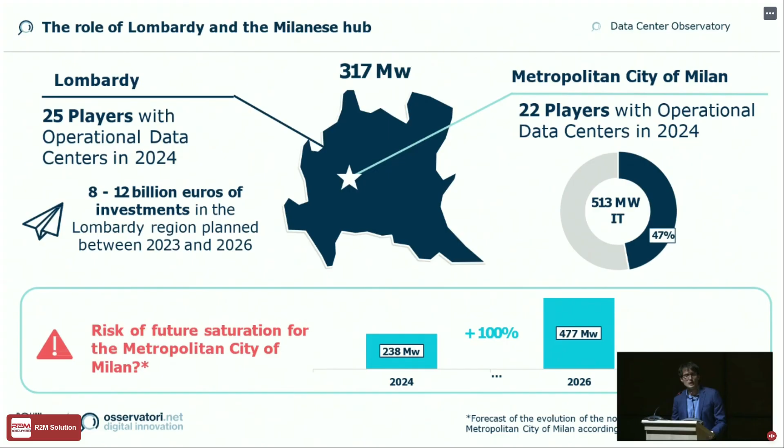And we expect to double the amount of data centers just in 2 years, because at the end of '26 we expect to arrive at 480 megawatts installed.

As I said, it's a very good moment for the developing of the market and to play an important role, not just for Italy but for the European market in general, because the European market usually was developed in the 5 most important markets, the FLAPD markets, but in the last couple of years they have had a slowdown in the developing of investments.

This situation creates an opportunity for all the Nordic countries, also for climate conditions, because of course it's easier to manage the temperature issues connected to data centers, but also for all the South Europe markets, so Spain, but of course also Italy. So it's very important to create a good environment for investments, because we could have a role as one of the most important computing centers, not just for our country but for all the European market.

So I think I gave you a little overview of this market. I hope it was interesting.

Fantastic, thank you so much for this introduction about the market, definitely necessary as context. So let's move on with Gianluca Metti, who will tell us about why data centers are not an evolution of logistics, as we said before.

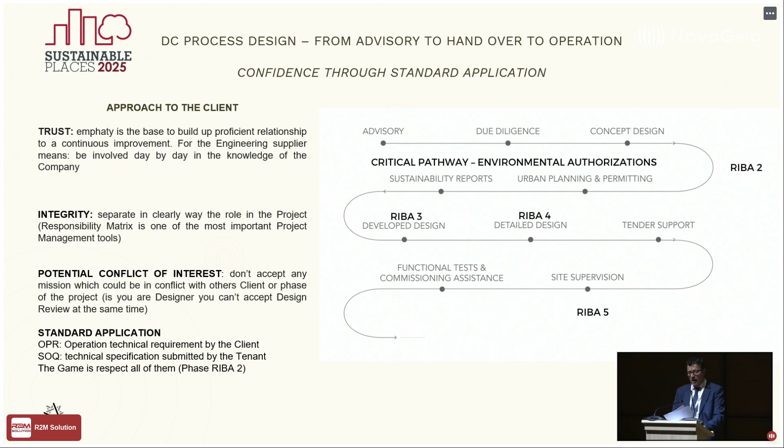So what is important is to develop a very strong relationship with the client, in any single part of the stage. The most important aim of the project manager is to define in a transparent way where the risks are, how we intend to mitigate them, and what that methodology is. So if we wanted to go through this conversation, the critical points are...

The critical points start from a different system to measure the key factors in a data center that are totally different from logistics. Logistics measures efficiency on square meters, and the value of the asset, of the land, is measured on that. But it's not the same for a data center.

Data centers have as a fundamental key point how many megawatts can be delivered for IT, and the capability of the asset to receive electricity power. So when you are doing a test fit, in all the process you have to follow during the due diligence, the first request is how many megawatts we can deliver in the asset.

What is one of the most important key points for efficiency is the PUE. The PUE is a very simple indicator that measures the total facility power over the IT equipment power. That means that if 100% is the need for IT, a PUE of 1.5 means that you need 50% more to ensure the operation of a data center.

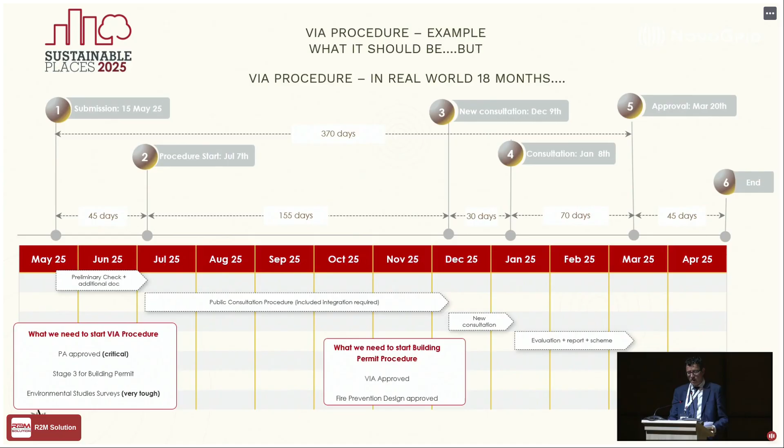It's, in my opinion, very interesting - let me take only 2 minutes about the design process and the learning curve we have during the design phase. Usually for DC field we use the RIBA process. This is a protocol defined by an English institution, and they develop the RIBA in 7 different stages.

But what we need to focus our discussion on is only the first 5. The first stage is related to advisory, and usually we take the RIBA till RIBA 1. At the end of RIBA 1 we have a test fit, which is an exercise that tries to fix in a geometrical way the capability of the plot, but it's not yet investigated for the next stage - that means environmental, for example.

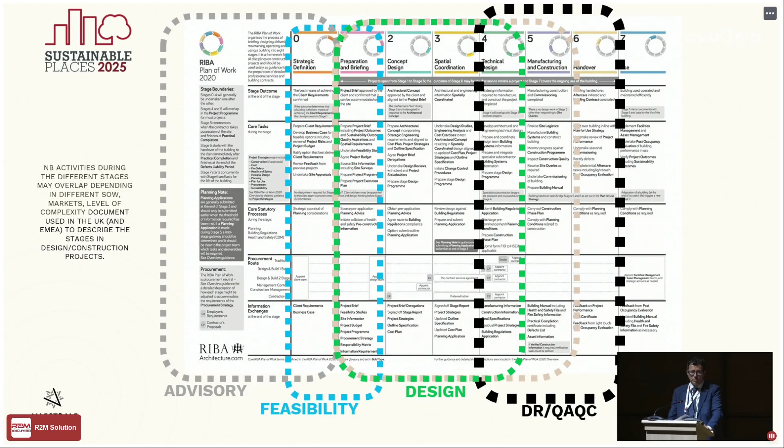The critical point is totally on the second stage, where you have to totally complete your survey. You have to be sure that you can go on and proceed with the building permit. Then, after the third stage, which usually is our definitive stage in the Italian protocol, we can launch the building permit application and also investigate the market with the contractor - not in a definitive tendering way, because we need stage 4, but we can collect all the offers.

The plant replacement strategy is one of the most important reports of the total design process, and we need to implement it in stage 2. If it's not possible to remove something from the plot, for example a transformer or genset, it's not correct to go on with the project.

What happens after the design phase? The engineering company can also be involved in QA/QC and design review. These are two different things. Design review is when the client asks a third party to go deep into the project and try to individuate room for value engineering.

QA/QC instead is a process of quality control, because usually when you work in other countries you don't have the clerk of works. In Switzerland, for example, this is the case, and you need QA/QC. This relates to the point I described before about the potential situation where integrity of the professional is needed, because QA/QC and design review cannot be covered by the people who developed the engineering.

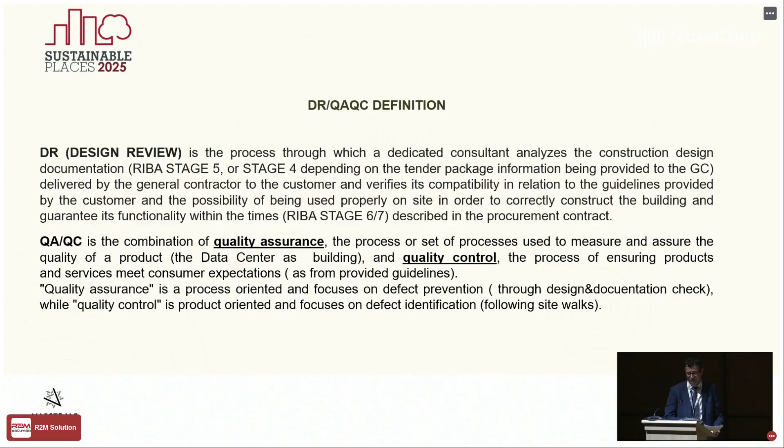Thank you, Gianluca, thank you so much for showing us. Maybe there were some additional slides in the deck, but I think it was a very good introduction and anticipation for the next speaker and topic we'll address now. You mentioned and argued that data centers are not logistics, but also introduced the idea that there are many different stakeholders involved in this long life cycle. So Mattia Mariani will now tell us more about key performance indicators and the different stakeholders and what interests they bring into data centers.

Good afternoon. For me, the data center market is a topic I started working on 10 years ago. One of the points I discovered when I started on this topic is that it's different from other asset classes. And the question is, which is the key performance indicator that is appropriate for this asset class?

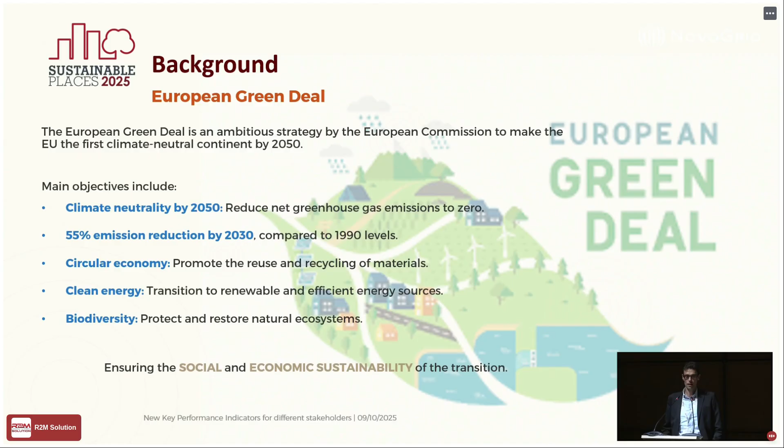Starting from the background, the data center market is the same as other markets. We start, in any case, from the European Green Deal, and I feel it is similar to other markets. As a data center provider and consultant, we have the target of climate neutrality and the reduction of emissions, and it is the same. But there is something that is different.

These two topics are really important key elements, and also part of the discussion when people say data centers are bad or not sustainable. The topics are related to water usage, renewable energy, and how the data center can be integrated with the city and the community where they are placed.

The directive gives us some points we have to measure, and it's really important for the data center market that these parameters have to be declared and measured every year when the data center is operating. This means that for the data center market, these key parameters are not only important for efficiency, but also because it is a European regulation we have to comply with, and every year you have to declare it.

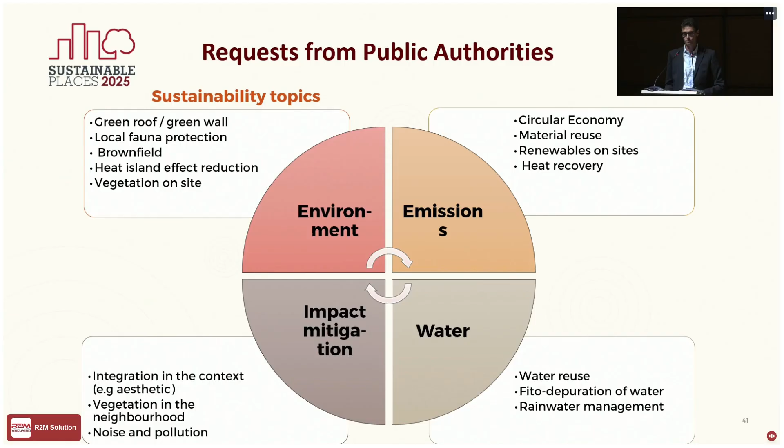The reason is simple. When you use artificial intelligence on your mobile phone, you want a very quick answer. And for that, you need a data center close to you that can give you the network needed for the connection. So it's really important: if we put the data center closer to the city, we need to integrate it with the city. The integration with the city comes from several points.

As the Italian Data Center Association, the sustainability group works a lot on the ESG topics of the data center. One of the main topics was related to the connection with the community, and how the data center can be connected to the community. There is one topic really focused on, not only by the data center provider, but also by the regulation.

And the topic is heat recovery. Data centers produce a lot of hot water, and this water is waste for the data center. If we are able to recover this heat from the data center, we can use it for the city. This is the first way that allows us to create a connection between the city and the data center.

The second is integration. This means the data center gives an advantage to the community that lives close to it. Taking from something that comes from the regulation, from the VIA process, I can say it is really important that there is a focus from the data center market on the people who live close to the data center, creating a high quality environment.

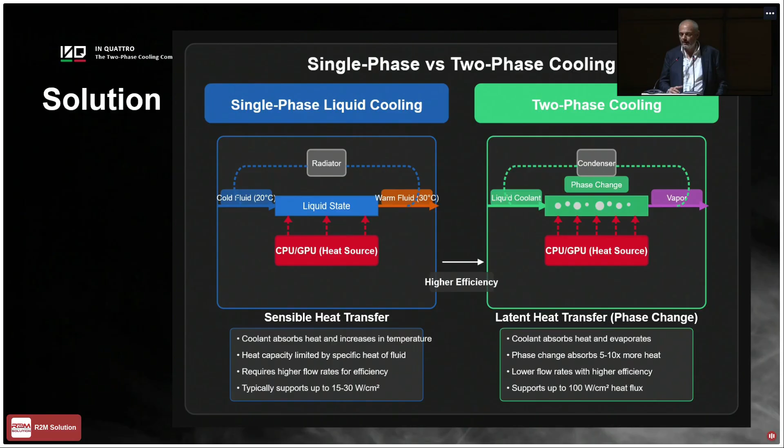Heat generated by the processor causes evaporation on the heat exchanger, so the higher the thermal power, the higher the quantity of vapor. If we compare this with a liquid cooling system, where heat is removed by increasing the temperature of the liquid medium, we find that this new cooling technology is more efficient than standard liquid cooling technology. This means lower flow rate, which is a critical and very important parameter, and in general a very high thermal power can be removed from processors.

So what are the advantages that this technology can provide to the data center industry? First of all, very high thermal power density can be removed, up to 100 watts per square centimeter and more, 120, 150. Maybe for you these figures are not interesting, but 100 watts per square centimeter is, just to give you an idea, in the lower range of fusion reactor components.

Of course this is the lowest range; the highest range is maybe 5,000 watts per square centimeter. So it's completely different, but this just gives you an idea of the high values we're reaching with the new GPUs. For example, the H100 NVIDIA GPU, famous for being used for ChatGPT, is about 70 watts per square centimeter. So we are quite near the limit that I mentioned.

Another advantage is that it's possible to use a dielectric fluid, so we don't use water. A dielectric fluid doesn't conduct electrical energy or electrical current. So even in the case of accidental leakage, you don't have destruction of electric and electronic components under tension, with tension applied.

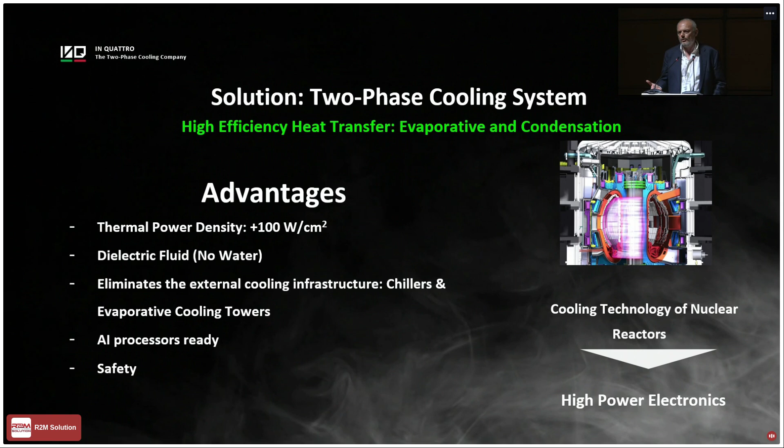So these are the main advantages of this technology. What is the origin of this technology? We didn't invent anything, actually. This technology has been developed over the last 60, 70 years for nuclear reactors, but of course at large dimensions and geometries. What has been done during the last 30 years of research around the world is to reduce the dimension of these systems down to the size of electronic components in order to cool them. These components are generally related to high power electronics.

Okay, so what is possible to do with this technology? The PUE, the power usage effectiveness, can be reduced from the range between 1.5 and 2.5 for a traditional cooling system. This depends on the technology used in the data center and the quality of the cooling system. It's possible to reduce this down to a theoretical limit of 1.05.

Between 1.05 and 1.2, this range depends strongly on the configuration of the data center. Just to give you an idea, if you put the external heat exchanger called a dry cooler - a system that is not a chiller and doesn't use water - you release the heat generated in the processor outside with this system. If you put this at 30 meters distance from the data center, the PUE is about 1.07. So this is just to give you an idea of how important the design and configuration of the data center is on this particular KPI.

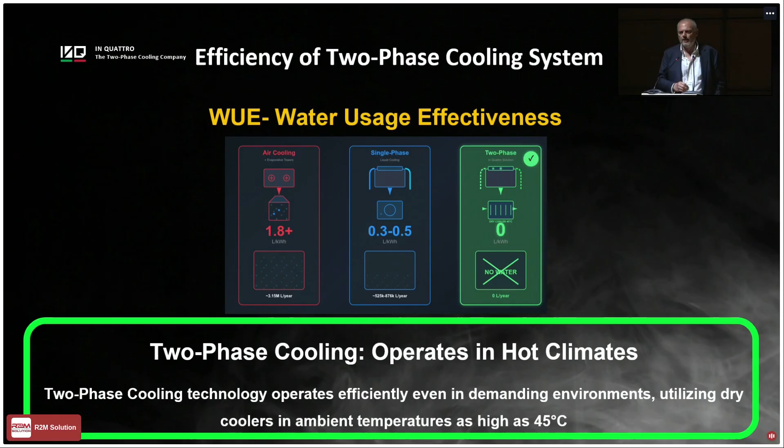Today we are also working on developing a new patent in order to increase this limit up to 60 Celsius degrees. Why? Because even when external ambient temperature is 45 Celsius degrees, you can find that on the surface of the heat exchangers, on the roof of the data center or outside the data center during summer season, you can reach higher temperatures, like 50 or 55 Celsius degrees. So this is the reason why we are going to improve this value. But not only for this, but also for a European project where we are involved with other partners, and this project will be presented later.

So with this system, it's possible to simplify the design of the data center by using fewer mechanical components, and as a consequence you have lower maintenance overhead. In the case of a two-phase cooling system, actually you don't need maintenance, because the fluid is quite clean and you don't have issues inside the flow channels or the piping system.

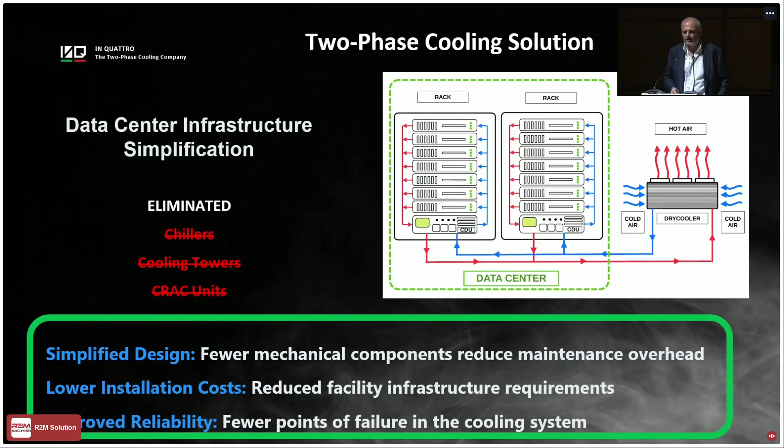This is, again, as I told you, due to the more efficient heat transfer mechanism of the system. We also use aluminum as a material and not copper. This decreases the cost and also the mass of the system, and it also reduces the cost of manufacturing, because aluminum is much easier to work with.

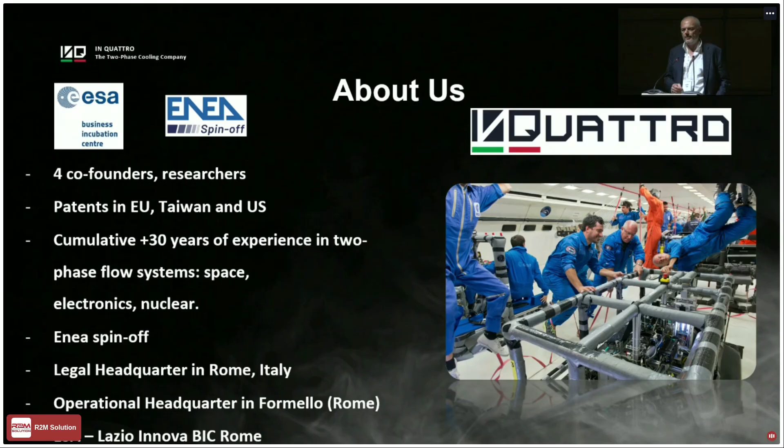So this is the team. At the moment, we are about 12 people, and in the future we are raising a funding round, so we will increase this number of people.

So thank you for your attention, and I just want to mention that In Quattro is the company, and sometimes you can see Eva Cooling. Eva Cooling is our trademark for our technology. So thank you.

Thank you so much. A very interesting journey into energy optimization. And also congratulations for this interesting company, bringing up the evidence that there is a transferability across technical domains. So really interdisciplinarity can help advance sustainability in the sector.

And now Alessandro Piccinini will tell us instead something about the applications of digital twins to support decarbonization. Thanks.

Thank you for the introduction. Good afternoon, everyone. So before starting with the presentation of the R2M digital twin solution to support decarbonization processes, I just prepared a very quick introduction regarding the energy impact of data centers in the coming years.

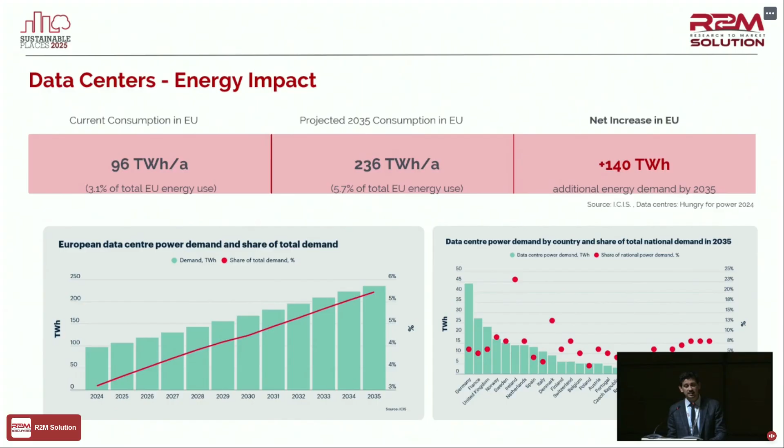Currently, data centers are consuming around 96 terawatt-hours per year, and by 2035 it's expected to increase by 140 terawatt-hours. This is a huge increase, but since it's always difficult to understand these big numbers, I prepared a comparison with the new EPBD4 challenge.

That is one of the main arguments that R2M treats. Basically, the new EPBD gives some targets for residential and non-residential buildings. For non-residential buildings, we have two main targets. One target is for 2030, with the main scope to renovate the 16% of the worst performing buildings. And the second target is to renovate 26% of the worst performing buildings.

So here I prepared a very quick raw calculation, and probably the consumption will be a big target, but it's not the point of this presentation.

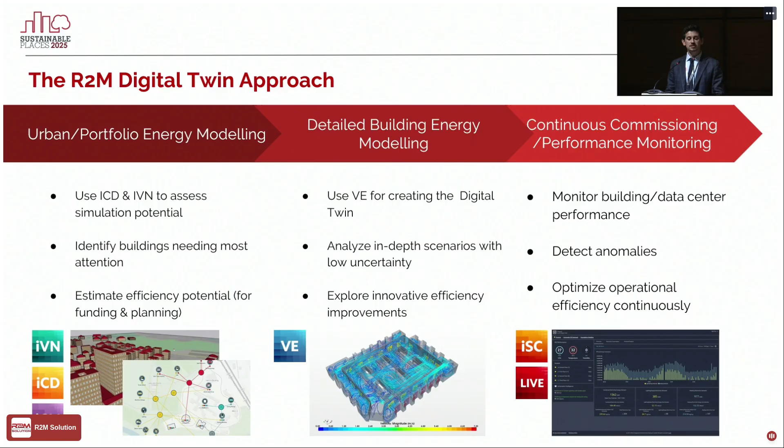Finally, this is a new path: continuous commissioning and performance monitoring. Here the scope is to utilize the detailed model to detect anomalies in the real building. So to do monitoring, but not just monitoring, but also reuse the detailed energy modeling to assess and do fault detection and diagnosis in buildings and data centers.

So at this scope, in order to present our digital twin approach, I'm going to present a series of case studies, hoping that they can be interesting.

The first case study is a work that we did with Eurac and Seingim for the municipality of Padova, where the scope of R2M was to assess the energy needed for heating and cooling for the whole municipality of Padova. What we did here was to utilize the ICD tool in order to model the whole municipality, and then, thanks to the tool, we were able to assess the heating and cooling demand of the municipality. With this heating and cooling demand, we created the district heating and cooling grid.

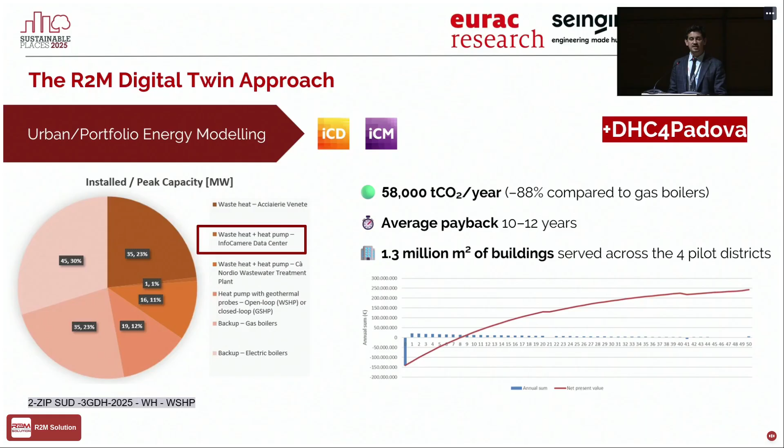Just to mention, from the grid, we were able to recover some waste heat from a data center, and thanks to the recovery of waste heat, we were able to have a very good return on investment from the district heating and cooling grid. So here you can see some numbers.

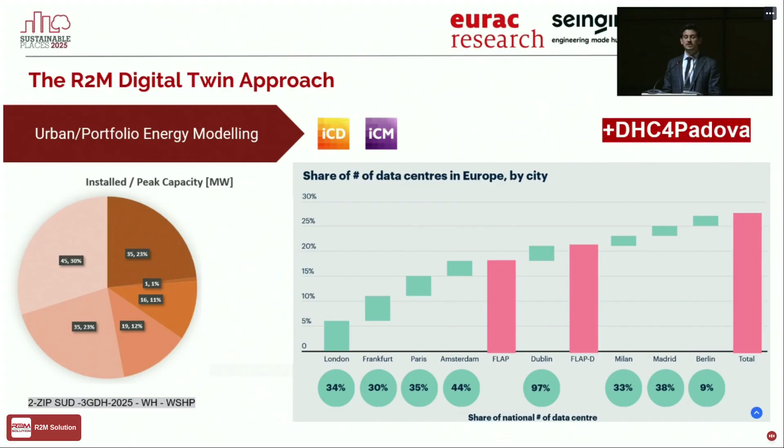What I would like to mention is the importance of this kind of analysis, the urban level energy modeling, because as you can see from this slide, in the EU most data centers are located in big cities. 34% of the data centers in the UK are located in London. 97% of the data centers in Ireland are located in Dublin. So it's very important to do this kind of urban level analysis to understand how much we can recover from these data centers and how much we can give to buildings in order to improve the efficiency of the data center, but also to improve the efficiency of buildings that are near the main cities in Europe.

So the scope of this work was not just to take the plaque of LEED, but to follow the design team in reaching the best energy efficiency for the building.

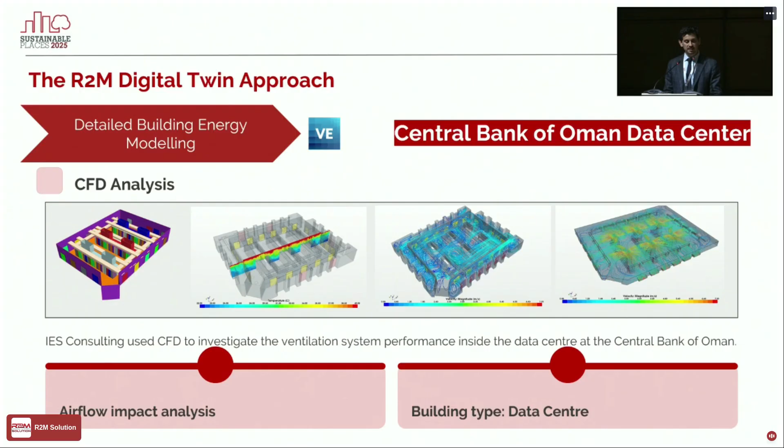Another case study, this is from the IES team, made again with IES VE, the detailed energy modeling software. In this case, the scope was to study the ventilation system of the Central Bank of Oman data center. We utilized CFD analysis and did a detailed study of the ventilation in order to improve the ventilation system inside the data center.

So the only problem right now with these models, these detailed models in general, is that usually after this kind of analysis, they are not used. They go in a bin.

So the scope of these two platforms, iSCAN and IES Live, is to reuse this kind of model for doing anomaly detection, fault detection and diagnosis, for monitoring. What we do here is use the platform IES Live, in which we can monitor all the performances of the data center. But we can also compare the performances of the data center with the digital twin that we made with IES VE software. By comparing the real consumption and the simulated consumption, we can detect anomalies, simulate energy efficiency scenarios, and things like that.

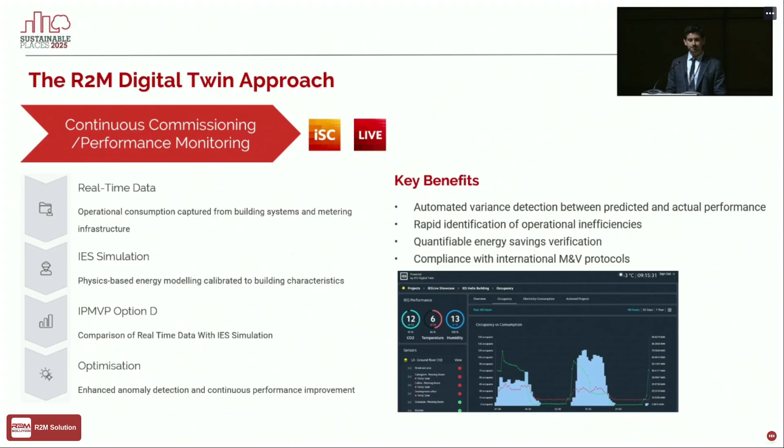So last thing, the slide is a bit crazy, but this is a new application we are creating to give our experience to everybody. We are creating this new application, it's in a proof of concept phase. Basically, this application can be used by anyone who can put in information regarding the building. The scope is to have different archetypes, and one of the archetypes will be data center.

We already did a proof of concept for schools, and it worked well. I will present the case study later. Basically, this application will be a web application in which the user can insert some data regarding the building, and automatically the application will...

estimate the missing data regarding the building. And thanks to our experience in terms of energy modeling, we created an algorithm that will be able to assign this building to an archetype and to an energy model. Thanks to this methodology, we will be able to estimate the result of efficiency scenarios in different types of buildings.

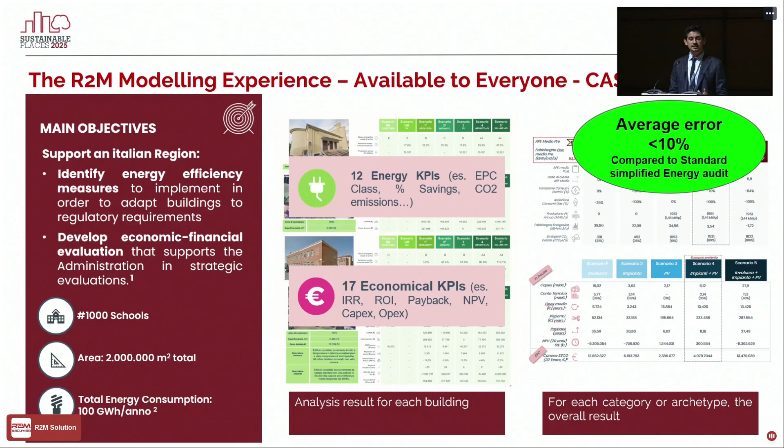with an average error compared to a standard simplified methodology of around 10%. So to conclude, if you're interested in this kind of product, tomorrow we are going to do a short workshop in room 5, where I will present the ICD platform and the iCM platform, the two tools for urban modeling. If you're interested, I'll be happy to present them to you.

Power quality refers to the flow of electrical power that supports proper operation, but the problems are connected to stable voltage, frequency, waveform, distortion, and interruptions. Interruption is one of the main topics of this speech. Voltage regulation and micro interruptions, also called micro outages, are problems connected to power quality.

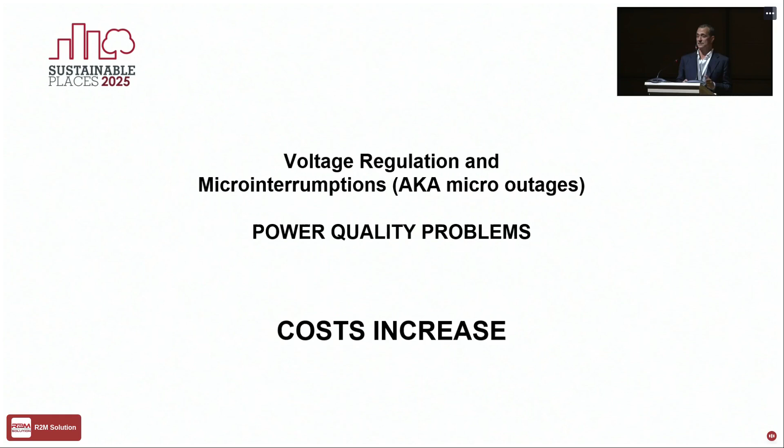The result of this is cost increase. Due to these problems, companies, industries, data centers, everybody has a huge increase of cost. Most of these problems are not due to the building, the property, the company, or the factory, they are due to the grid. But why?

There was a power outage that involved almost all of Spain, Portugal, and part of France. That means that in less than 5 seconds, 15 gigawatts, almost 60% of the energy distributed in Spain, suddenly switched off in 5 seconds. Try to imagine your company, click, in 5 seconds, your computers, undergrounds, all the plants or the servers, everything switched off in 5 seconds, and it lasted 10 hours. Just to give you an idea, this problem caused more than 1.6 billion euros in damages in 10 hours.

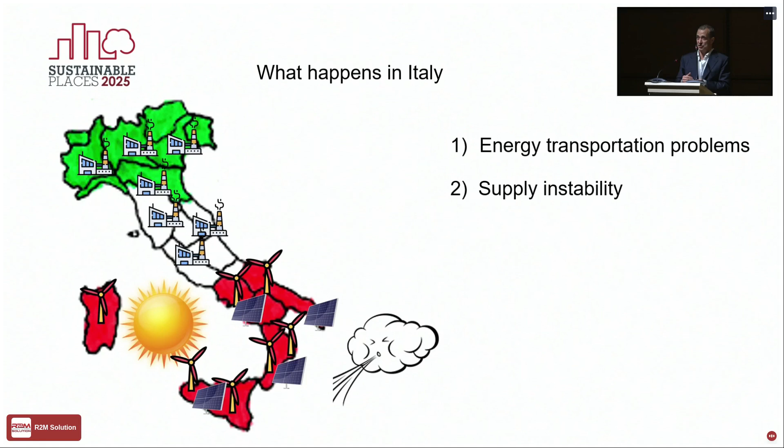What is Italy doing? In Italy, we have Terna. Terna is the grid operator in Italy. I can say Italy is much, much more advanced under this point of view than many other countries in Europe, included, of course, Spain, but also France, and UK. It's completely another level.

Terna is deciding to invest 23 billion in the next 10 years. Who do you think is going to pay these 23 billion? When people say, oh yeah, energy now it's very expensive, it will be low in the future — I'm not so sure about it. How will they invest it? Exactly in the points that we just discussed: increasing the cables, also connecting in a better way the islands, Sardinia and Sicily at the beginning, but also the connection with the renewables.

The grid must understand and must predict what the renewables will do based on the forecast. Of course, AI is helping a lot on this. But this investment will keep the problems of instability and transportation, of increasing tension, and micro outages. So, what are the solutions?

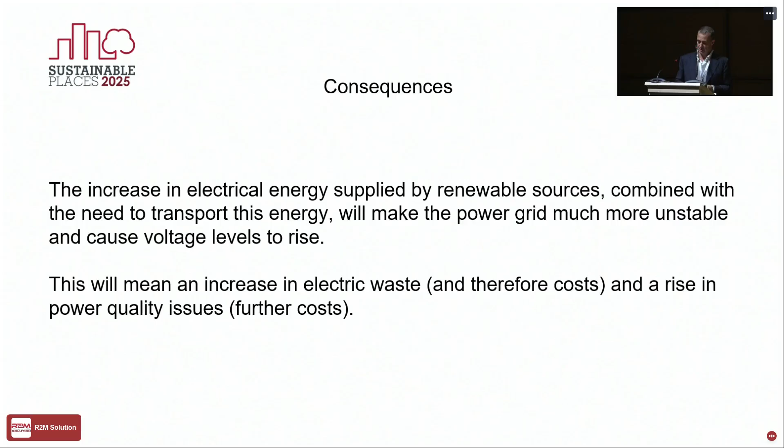The first one is the voltage optimization. Very quickly, the grid gives you a theoretical 400 volts in low tension power. But you must think, what do you do if you switch on all the plants, everything in your company? You must be ready to have enough tension to make everything working — if you open all the taps in your flat, you must have enough pressure to use all the taps, three showers, your wife, your son, whatever.

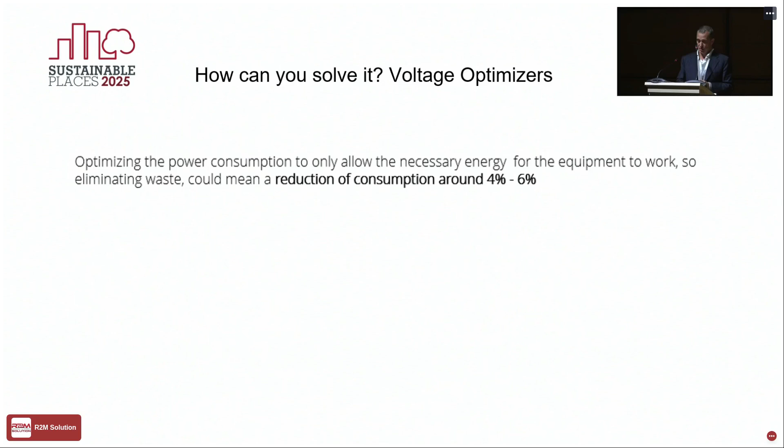All this extra tension becomes heat, becomes something that you don't feel, you don't use — it's thrown away, transformed into the effect of Joule, in a short time. So all this energy that is thrown away is paid by the consumer. There is a technology called voltage optimizers that can give a reduction in terms of electricity consumption between 4 and 6%, somehow filtering — I'm making it very, very easy — filtering and keeping all the extra tension inside and using it. So you do the same work using less energy, what we called at the beginning energy efficiency.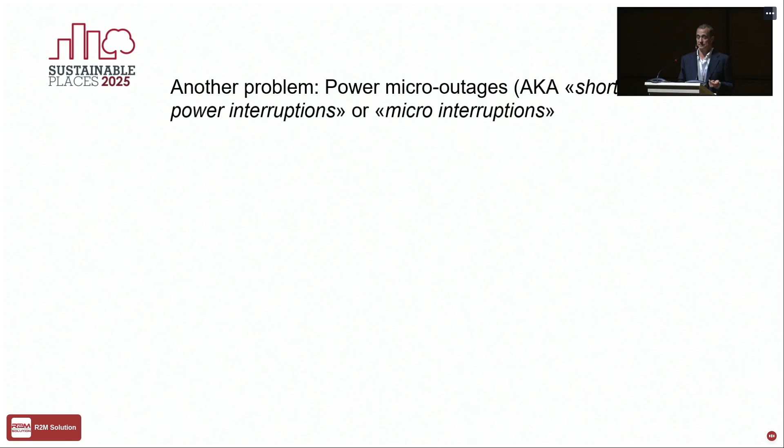This is the solution for voltage. Micro outages are interruptions, usually less than 1 second, that you could say, oh, it's just the light flickering or something like this. But especially for modern plants, it's a huge problem because modern plants have a protective system that, if there is a lack of energy, says oh no, something's going wrong — I stop everything before everything is gone. That means you have to stop the plant.

This problem could cause an incredible amount of money and trouble. I decided to give you an example of a company, one from a completely different field.

There is another example of a company that makes microprocessors close to a fab, but I don't want to talk about it. I can tell you every micro interruption costs them 300,000 euros. This company makes...

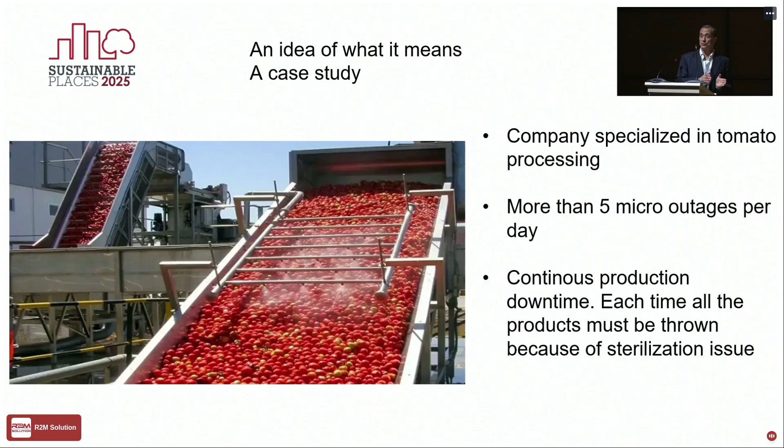Tomatoes. They make salsa. They are specialized in tomato processing. They used to have more than 5 micro outages per day. That means every time there is a production downtime, they have to throw away all the tomatoes already boiled, chopped, sterilized, because the sterilization process is interrupted.

So the product is not safe anymore. Try to imagine all the work you've done is thrown away because of micro outages lasting just 0.5 milliseconds. For them, it was a problem costing thousands and thousands of euros every day.

So they were considering moving the plant entirely to another place. Of course you can complain to the supplier, ask for your money back, whatever. But if you have to provide the sauce to Barilla or to Chile or whoever, and you don't deliver the product, it's not just about money, it's much more.

The solution to this kind of problem is a micro outage compensator. Without going deep into this device, what does it do? It works by supplying energy that flattens the outages, staying hidden and waiting all the time. When there's a problem, it activates and says, okay, you need energy for say 0.3 seconds, here it is. This gives continuity and the opportunity to keep working without problems.

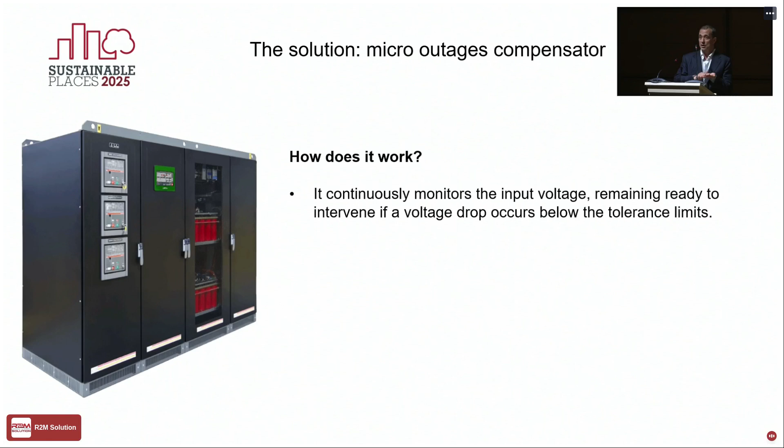So, final consideration: the problem is now as big as an ant, but it will get bigger and bigger in the future, and it will very deeply involve the investment, the ROI, and the business plans of companies. The good news is that solutions exist, and the market will develop more solutions in the future because we will have more problems.

This technology has been on the market for 15 to 20 years. The problems are happening now because the cost of energy is huge, the consumption of energy is huge, and the problems are growing year by year. Thank you very much, bye.

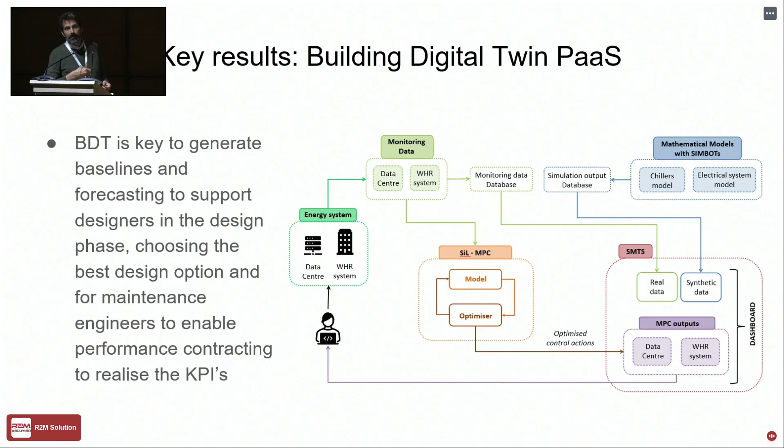adopt not only the data-driven approach, where we collect data from the real world and store it into a database that we can reuse to fuel some surrogate models used to optimize the system, but at the same time we would like to create a virtual copy based on mathematical modeling of each component that we have in the server room and in the building itself, in order to provide synthetic data in the end.

So we would like to pair the two, the real and the synthetic, to have a simulation tool that really works and that we can use with more flexibility to test new solutions like new control solutions, etc. The main limitation with data-driven approaches is that you cannot play too much with the system, especially if it is a critical mission system.

You cannot really destroy the system trying to characterize its behavior. With synthetic data, you can do anything you want, even planning to substitute part of the systems.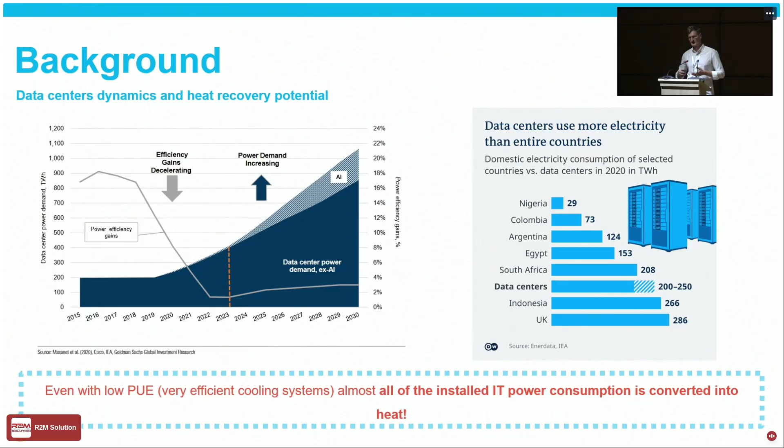The sum of all of the energy that's required for the data centers is comparable to the energy consumption of whole countries. It's a huge amount. And we're able now to reduce the PUE quite a lot. I think we'll hear more in the HEATWISE project after, about how to get to a PUE close to 1. But in the end, all of the energy that you put into the system will be dissipated as heat at some point.

And why not use that huge potential for something else? This is exactly what the MODERATOR project is focusing on. Our focus is really this waste heat recovery system, and we are doing that in different steps. Our main focus at the beginning is the development of an immersion cooling system, where the data racks are fully immersed in a dielectric fluid. We do numerical system simulations where the goal is really to get the dielectric fluid to the highest temperature possible to then gain as much as possible for a secondary use.

Then what we're also focusing on is the development of a storage unit to bridge this intermittent availability between the energy provider, so the immersion cooling unit, and the secondary use.

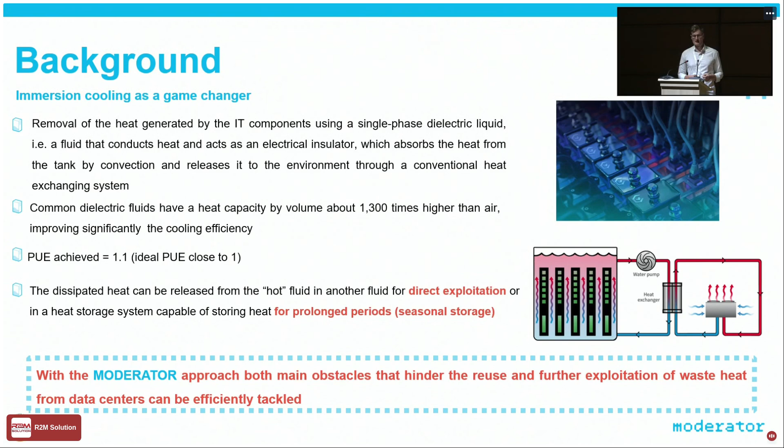Within the project, what are we really optimizing? First, as said before, we're looking at this immersion cooling unit to really reach the highest temperature possible. We developed three phase change materials that will be used to take the heat from the immersion cooling unit, store it, and then make it available for a secondary use that we'll look into a little bit deeper after.

And the last thing is this highly efficient multi-layered insulation material, where there's also a circularity aspect. So we look into insulation materials that are produced from waste, namely, for example, expanded glass spheres from PV panels and so on.

One of our main goals is to have a certain amount of scalability, so the system should be really modular. The immersion cooling unit that we are designing is 40 kilowatts, and the storage unit is also dimensioned to fit this 40 kilowatts. So in the end, from these 40 kilowatts, we can scale the system to any size that we want. This is really one of the main focuses of the project.

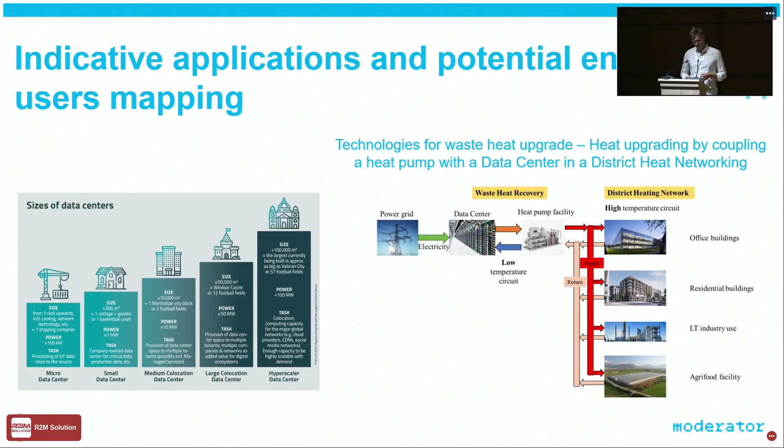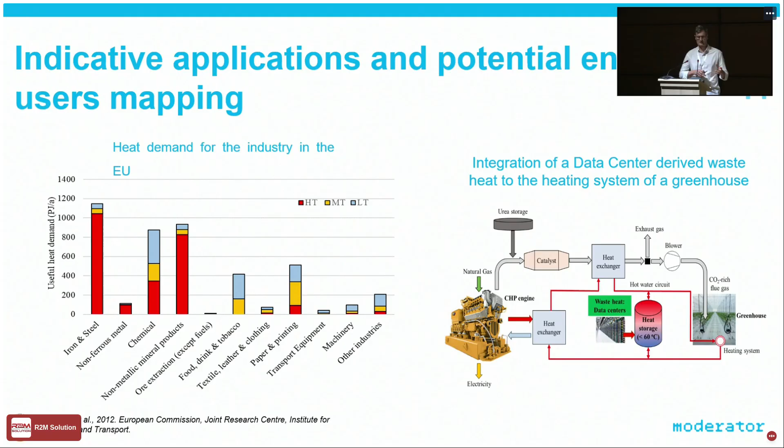This just shows another possibility. We're currently looking at different industrial sectors. We even already looked into different fish farms, for example, where you could use the heat. We have a case study in Norway, because there you need a lot of low temperature heat to keep the water temperature at a certain level. Then, of course, greenhouses are always a topic, and generally we're investigating where we can apply or reuse the heat that's stored, looking at different case studies.

Then just quickly into the consortium. We are actually 11 industry partners in this project, distributed all around Europe. With the first pilot that we're building in Greece, we are working together with Synapsicon. They already have some data centers in use, and we'll apply our system design to a real case there.

Then, for example, we have partners like Sintef, they do the whole simulation part, fluid simulation, how to really reach the temperatures within the immersion cooling unit. Gerosen and Opholite are working on the insulation material. We at HSLU, together with Cowa Thermal Solutions, are working on the material development, where we also have a pilot plant already in operation in a building district, providing heat for domestic hot water and floor heating for these buildings.

Then we have Hycool IT. They are developing the whole system integration, the interaction between each of the components, and there's quite a strong representation in Greece.

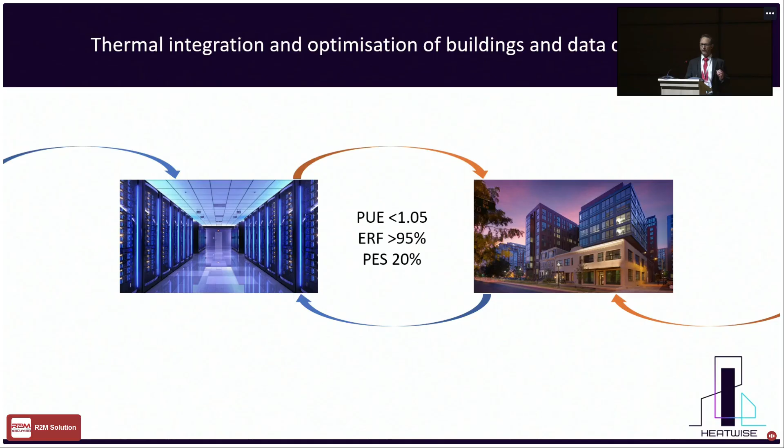Good. We have 3 key indicators: PUE, which you've already heard about - this is one of the most important, yet often challenged, indicator of the data center industry; ERF, energy reuse factor; and primary energy saving. These are our 3 key objectives, and this is world class. You've seen from the previous moderator a PUE of 1.1 - that's already excellent. The average in Europe is now 1.618, but there are still data centers with a PUE of 2. An ERF of 95 means we are capturing almost all the heat that is generated. And a primary energy saving of 20% means a massive CO2 reduction.

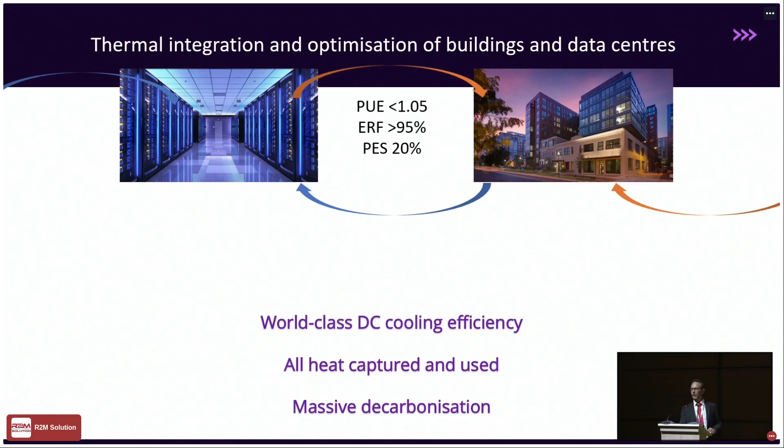Before going further, I'd like to invite you, if you are engineers, to convert yourselves into businessmen. What is the meaning, from a business perspective, of the PUE? The 1 describes the energy consumption, the energy cost of the IT. After the dot comes what is related to cooling and all kinds of auxiliary energy consumers, electricity consumers. So when we usually talk about efficiency of data centers, we're talking about the figures after the dot - so 0.6, now 0.5. But when we talk about heat recovery and heat reuse, we are also talking about the first figure, the 1 - practically 100%, or maybe 98%, of the electricity is converted into heat. So we are talking about both of these figures.

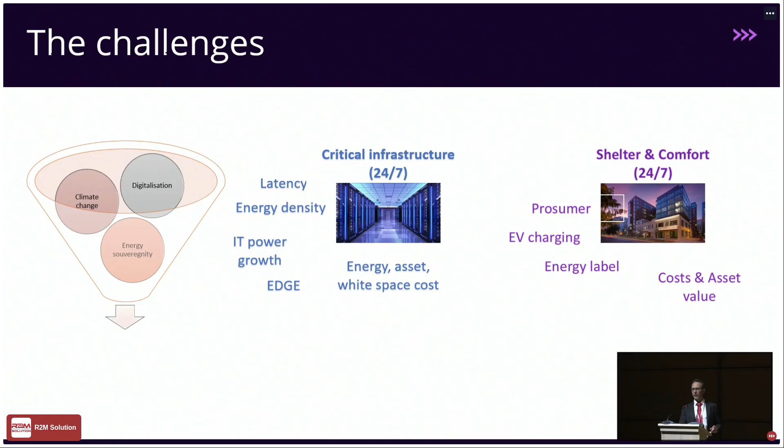Let's see further challenges. In the previous session there was already a lot of discussion about that, so I don't want to spend time here - latency, energy increase, EPBD, all kinds of cost and asset value issues with buildings, which determine how these entities are operated. Both are critical infrastructure: data centers have to work 24/7, and buildings provide shelter and comfort for equipment and for people. So these are two entities which are forced to live together - at least this is the idea of the research, and the idea of EPBD and EED. But what is the problem?

The problem is the cooling of the data centers and how it is happening. The mainstream is that 95% of data centers are air-cooled. Air is a very bad energy transfer medium. Practically, how it's currently done: 18, 25, maybe 30 degree cold air is blown onto the servers, and what comes out is around 25 to 35 degrees. When you look at the building side, they are far from this range - especially if you're talking about a modern building with low temperature heating, these temperature ranges are not really good.

There is one more problem: how we are setting these temperatures, whether we are giving the right amount of cold. And no, we don't - sometimes the CPUs are overheated, there is a delay in provision of cold, and then thermal throttling happens. What does thermal throttling mean? You put a lot of capex into your IT and it is not working. Often the utilization rate - that was a KPI in the previous session - is maybe 60%. That's too low; your money is not working. So at the end of the day, you are wasting your money and wasting the energy you produced, and it is also going into the air, into the environment, practically like litter.

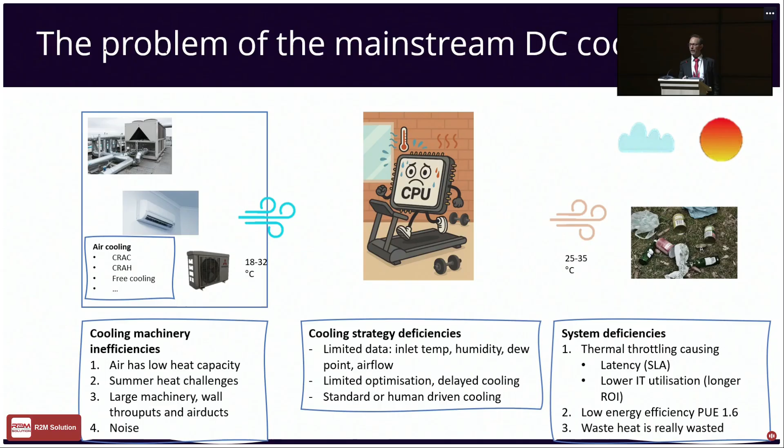And we thought we could do it better. We should not just think of adjusting the current way of cooling, focusing only on air temperature, because that's what the standards say - ASHRAE tells you what the humidity, the airflow, the temperature should be, and if that's fine, that's fine. But it's not like that. So we are focusing on the components - we want to know whether they feel good, we want to know what their temperature is.

There is an optimum temperature, or the maximum temperature where they can work - 70, 80, 90 degrees. So if we know their temperature, we know how much cooling to provide. So we provide air and we provide liquid cooling.

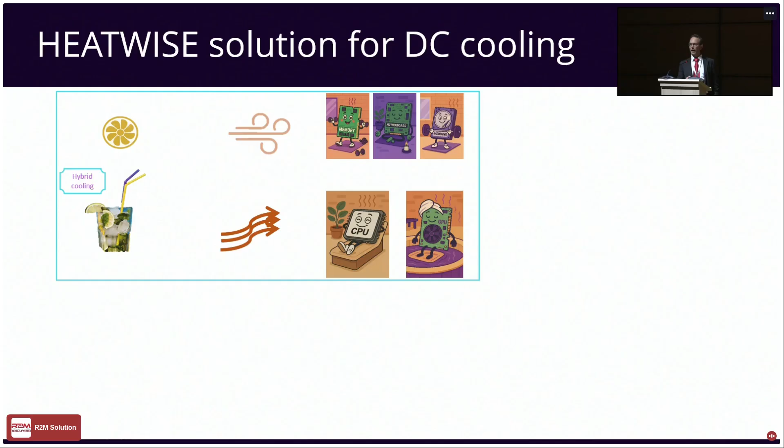You heard dielectric - you remember from the previous session what it means? No water, absolutely harmless, phase changing, okay? So the latent energy is also exploited, and we are giving it to the right component - liquid to the CPU and the GPU, and the rest gets air-cooled.

In this way, we can achieve much higher temperature levels, but these are already useful for the vast majority of the buildings.

Key here, as I mentioned already, is data. Data in all stages of the cooling system - at the production side where it is absolutely needed, the consumption, and at the building. So everything is turning around data.

If we implement this solution, we have a pretty impressive proposal. We believe we can achieve 95% of IT utilization, stable and on-demand temperature, even reaching 65 degrees liquid to liquid, which means also impressive business advantages in CapEx and OpEx. We believe we can achieve lower CapEx, lower OpEx, and an overall lower TCO.

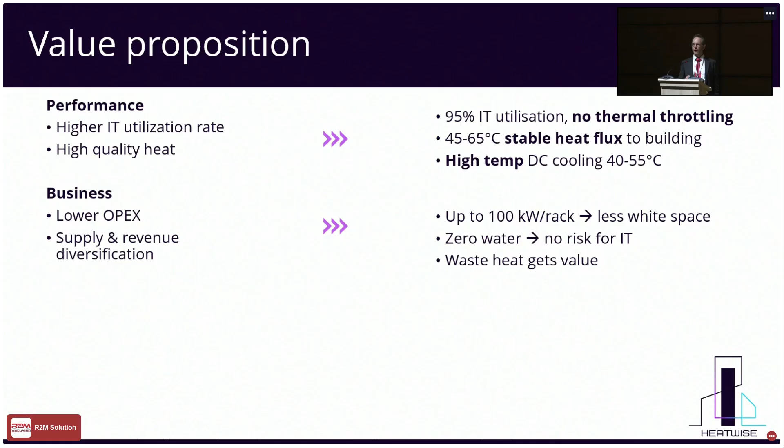And we can fit in one rack something like 100 kilowatts of IT, whereas currently it's around 5, 8, 12. So it is a big jump.

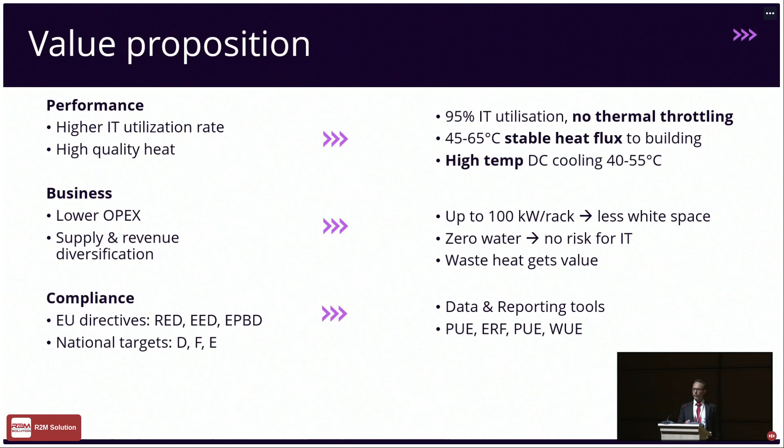We are developing tools that help with reporting, automatic reporting, and of course decarbonization. We are implementing this solution at 2 out of the 5 pilots - in Switzerland at EMPA, and at RISE in Sweden. We are half-time, still 1.5 years to go.

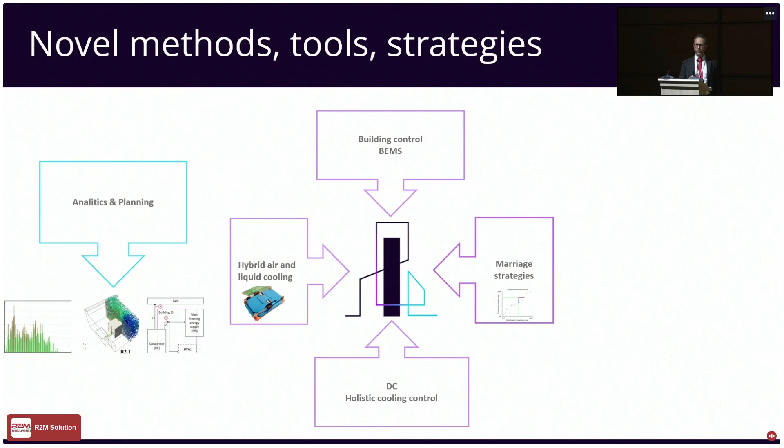Let's go quickly to the technical solution. We have several tools which we are developing - novelties in analytics and planning, looking at the building, what is the potential for waste heat. Then the data center and business case development is coming. So, analytics.

There is a new methodology that we developed, and new KPIs on how to assess the potential of buildings - how much waste heat they are able to absorb. We have some recommendations, very simple: find the low temperature systems in your building and connect your data center to them. We also developed a metering strategy.

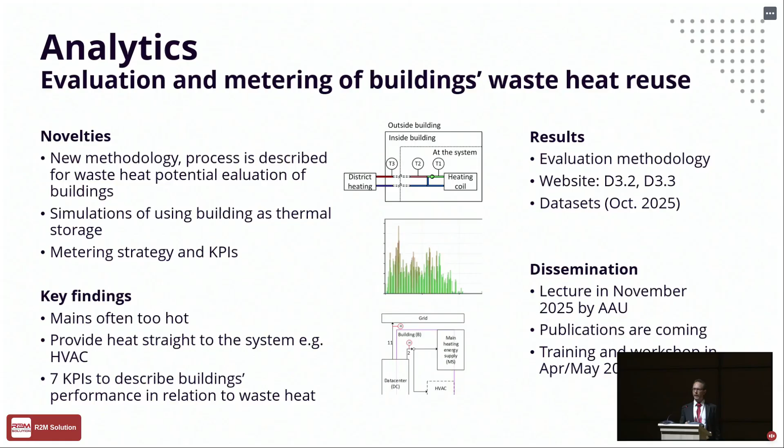For planning, CFD, we developed an open source based CFD tool. Before we touch anything, any investment, we simulate what will be the effect of the investments on the various KPIs. We are able to simulate on rack level, on server level, and cold plate level.

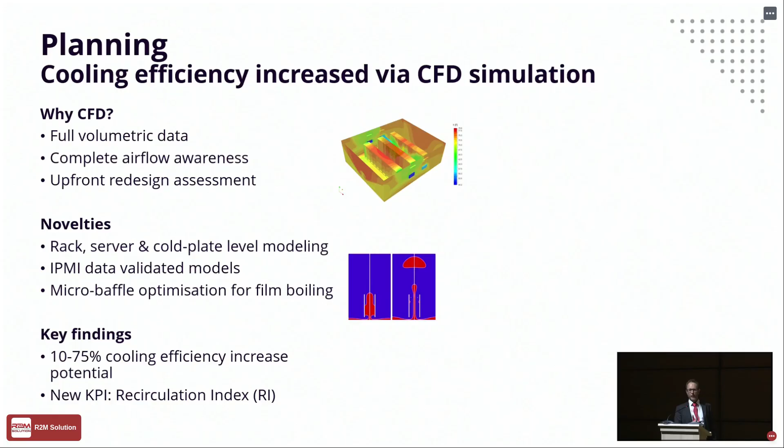According to our simulations, it's possible to achieve with small edge data centers a 75% efficiency without yet implementing our core solution, which is coming now - this is the core of our solution.

There is another part, which is the air-cooled part. Everything is in a closed rack, in a closed cabinet, supported with zonal cooling, air cooling.

So we have an orchestration tool, and with this orchestration tool and the MOTA algorithm, which is the maximization of the waste heat output, we are able to increase the waste heat output by demand. Depending where we orchestrate within the rack, we can achieve higher temperatures or higher heat output, or if needed, less.

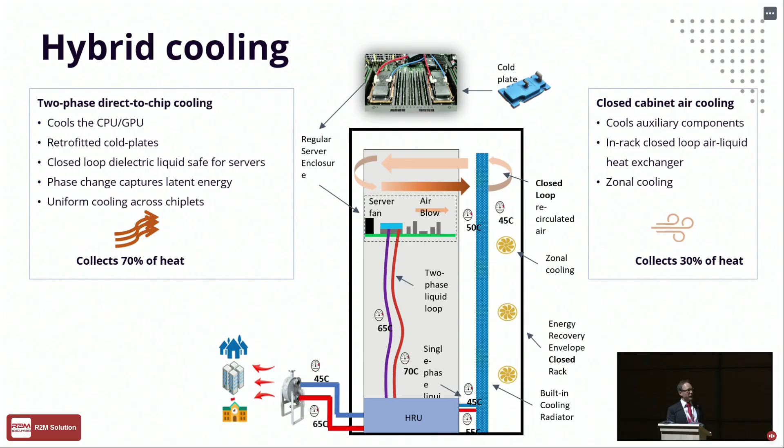One more thing - according to our wind tunnel tests, now we are starting to build our pilots. Approximately 70% of the heat will be captured by the liquid cooled, and 30% by the air cooled.

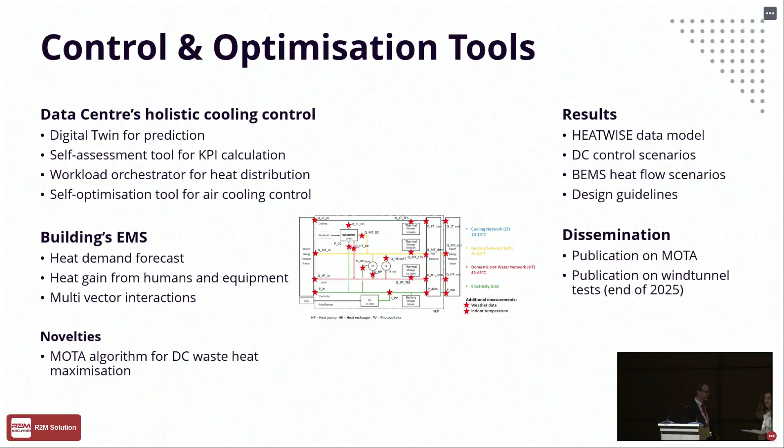Please, the floor is yours. Yeah, hi, hello. Oh, sorry. No.

I'm cooked now. I got confused, Robert Birke, exactly. I was not matching the faces. So please, the floor is yours. No problem, okay, hi, thank you.

I'm Robert Birke from the University of Turin, here to present the project DYMAN, which is a sister project to the first one presented. DYMAN stands for dynamically managed self-cooling HPC data centers. We started with 10 partners a bit more than a year ago, and after a successful hop-on, we are now 11 partners distributed across 5 countries.

So what is DYMAN about? We have three goals. The first is to develop two cooling prototypes. The first, which we've already seen a bit in previous presentations, is adsorption cooling, where we try to improve the technology. The second is two-phase cooling. The main thing is to combine these two cooling technologies to cool the data center better.

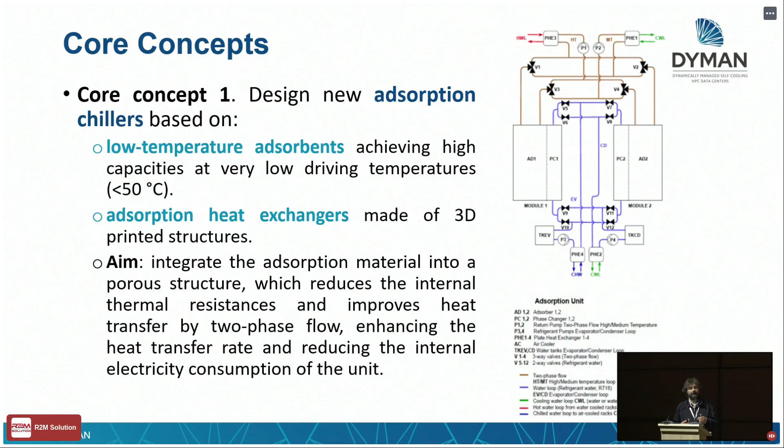Let's go into a bit more detail. The first core concept is designing new adsorption chillers. The main two challenges are: first, finding better materials so we can lower the temperature at which these adsorption chillers work; second, designing better heat exchangers to make the heat exchange more efficient. We do this with 3D printed structures, as we'll see later.

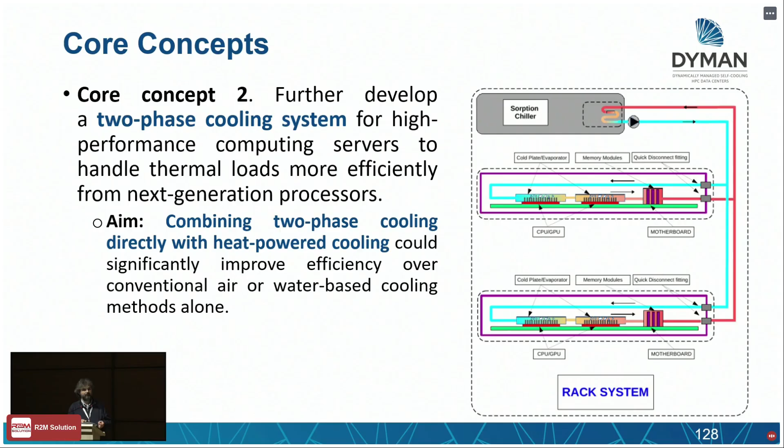The second core concept is two-phase cooling, where we want to integrate the two cooling technologies. The main challenge here is making the temperatures at which these systems operate compatible with each other. I won't go into too much detail on the two-phase cooling system, since there was already a presentation by Inquattro that went into great detail.

Just a short presentation of the test beds - we have two, as mentioned. The key point of having these two is scale. We have a small data center hosted by us, designed for 250 kilowatts, and a large multi-megawatt data center - or rather a supercomputer, the Mare Nostrum at the Barcelona Supercomputing Center. The real difference in applying these technologies at these two test beds is that they differ greatly in scale, which also means different technologies employed - for example, the first is air-based, the second is liquid cooling based. So we have to integrate these new cooling technologies with the existing cooling to eventually bring the heat out of the building.

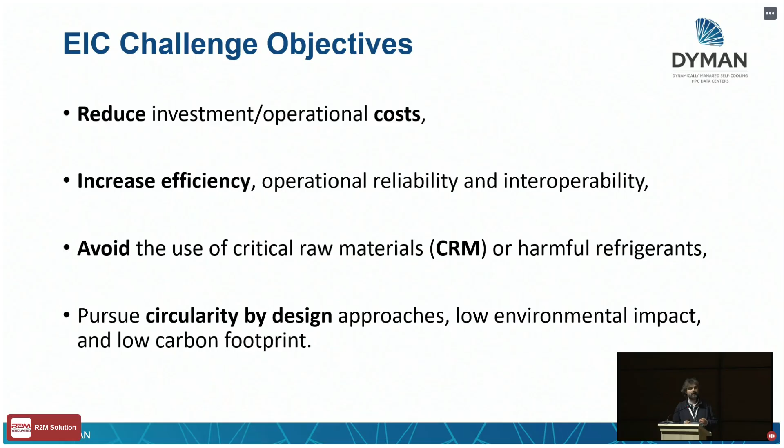The challenges we're trying to address: first, we want to reduce costs by reducing the power and energy consumed by cooling, which is good not just for the environment but also for your wallet - the less energy we consume, the less we pay. This is done to increase operational efficiency, and naturally we want to do this while avoiding any harmful refrigerants. There's a lot of material science in this project, both at the level of two-phase cooling and adsorption cooling.

The pillars of the DYMAN project are: we develop the cooling system, then integrate this cooling system with the management software, and then validate it. In parallel, we're also participating in EIC portfolio activities, which all the projects funded in this Pathfinder call are part of. So we're collaborating with other projects to see how we can pinpoint ideas together.

So the first one is this 3D printed heat exchanger, which has a very particular structure that increases the efficiency of the heat exchange.

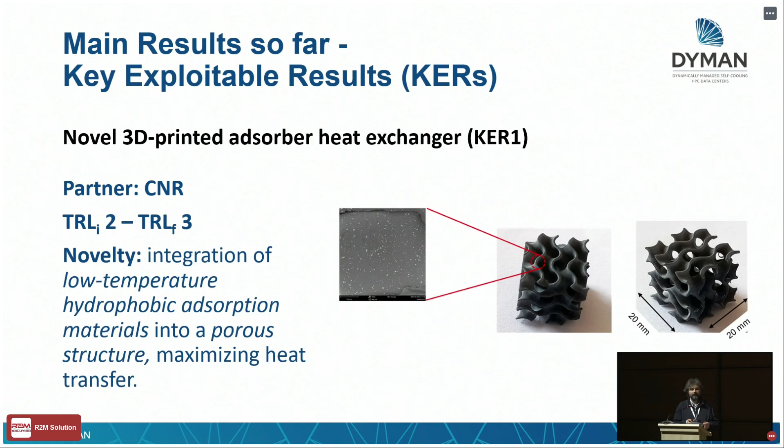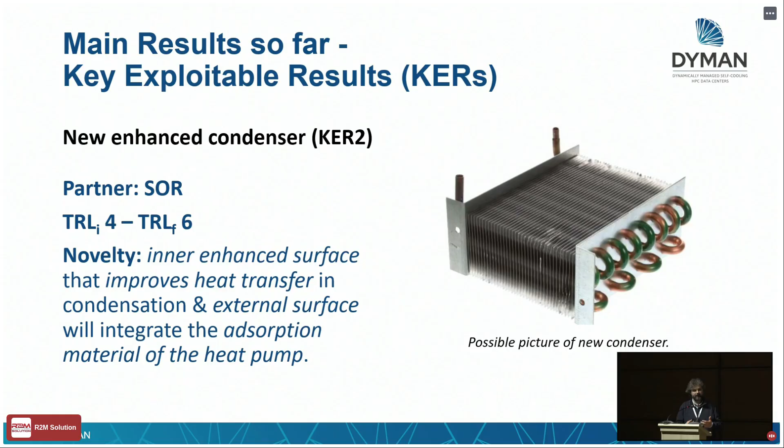Then we have this new condenser, which again is an improved version, so that we can actually improve the heat transfer.

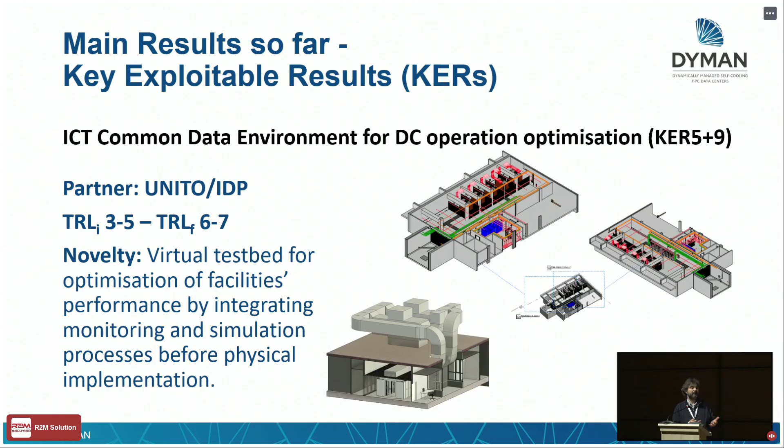Then we are also working on, because as my previous speaker said, if you want to invest you want to play around and simulate how much you can gain. So we are also creating digital twins of these two data centers, so that we can test design decisions before they would be implemented.

This is ongoing. And then, as I said before, we have this management software, which can talk directly with the workload manager and directly with the energy control systems, which nowadays are inside all the servers, to modulate the energy consumption based on the requirements of the workload.

And it has been now extended with an interface to be able to talk with the cooling systems in a data center. So as of now there's no new control yet, but we already put in place the fact that the two can communicate.

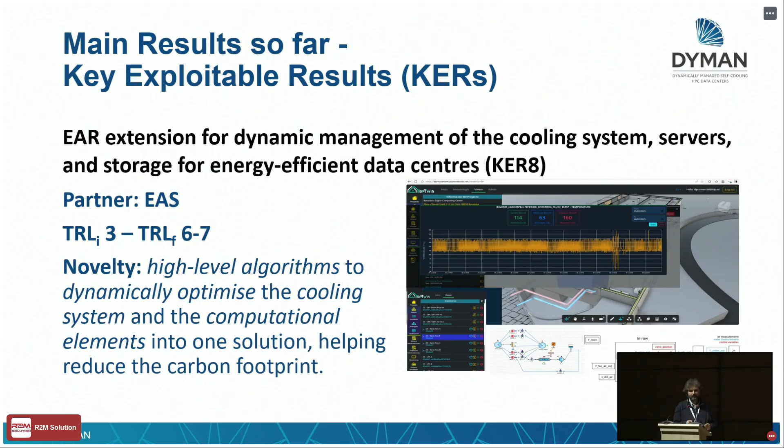Then, as a last key exploitable result, we have the SymBots, which are small mathematical models that can model the behavior of specific parts of the data center. We will want to couple these with our digital twins to make more precise predictions.

So basically, as of now, most of the physical components have been almost done. We plan to finish them by the end of the year. In parallel, we are doing the virtual testing of these components. And the last part of the project will be about validating these technologies in the real world, by deploying them in the two different test beds.

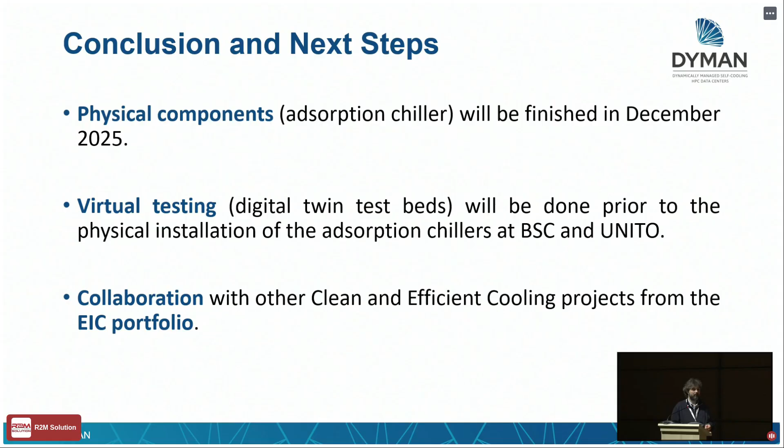And we will continue our collaboration with the clean and efficient cooling projects from the EIC portfolio. Thank you.

Thank you so much, Robert, and thanks to all of you for showing us these applications that are not only about the research, but really show how some research is generating innovations that can soon be taken into the market and applied in real life.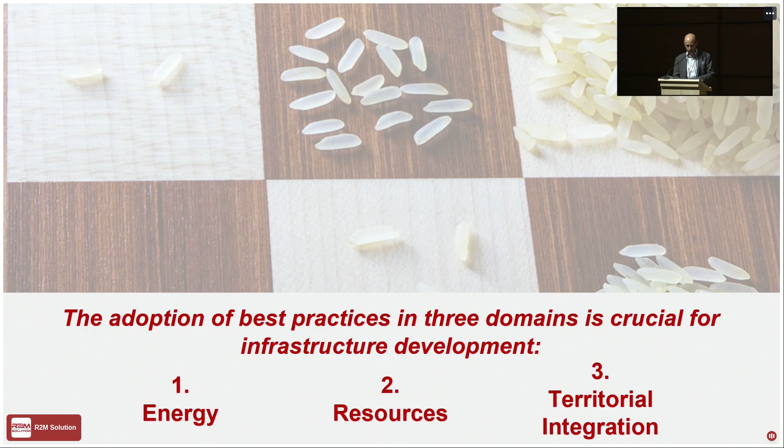Just a few words on this. Energy - we saw a lot of application earlier regarding the impact of different kinds of fuel. We made a very simple what-if analysis: what could happen in Italy if we are not able to decrease the PUE from 1.5-1.6, the current average, to 1.2. We would require more renewable energy equal to 60,000 football pitches - a lot of space dedicated only to a kind of waste of energy.

And what comes to my mind now is: why are advanced cooling technologies like liquid cooling, and others you already provided insight on, no longer optional? We need to go ahead with this kind of technology.

Here is our policy recommendation: best practices need to be proactively promoted by policy. If a data center project demonstrates maximized efficiency, minimized use of land and energy infrastructure, and delivers tangible benefits to communities, it should be granted access to a streamlined permitting process. We need policies that understand best practices in data center development, and policies that provide incentives - not money incentives, but time incentives - for developing data centers within the permitting process.

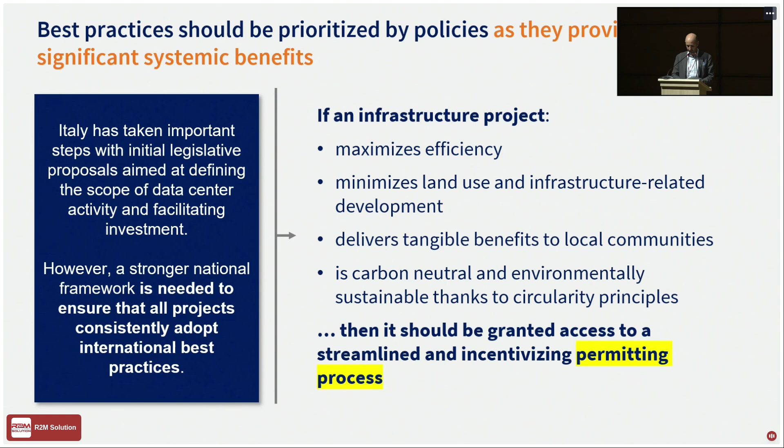Of course, this is a matter of building capacity and knowledge between policymakers and the people within public administration who are tasked with evaluating these processes. I just nominated energy - I think, I'm sure, it's the most important issue concerning data centers.

I also asked before why Italy arrived so late in data center development, and I'll provide a few hints. But let me say - we've spoken about how to decrease the PUE to 1.5, 1.2, 1.05. But the real matter now for those entitled to develop new data centers is not how to cool, but how to feed the data center with the required energy.

Currently we are leveraging old power lines dedicated to former industrial sites, and this will probably be used for only a few more years. We need to start thinking about what comes later, in order to allow the capacity to invest in Italy. We're used to hearing from data center developers to 'follow the cable' - follow the data connection - but now the mantra is 'follow the power.'

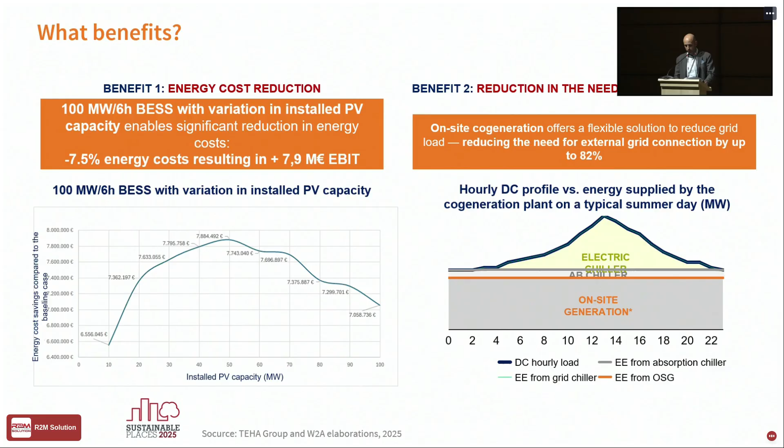So I would like to conclude with a topic regarding where we are in terms of maturity of our value chain, how much we are able to capture value from this development currently in Italy. The answer is that our capacity is quite poor, because our value chain in Italy, and especially in Europe, is not prepared to face this increase of potential demand.

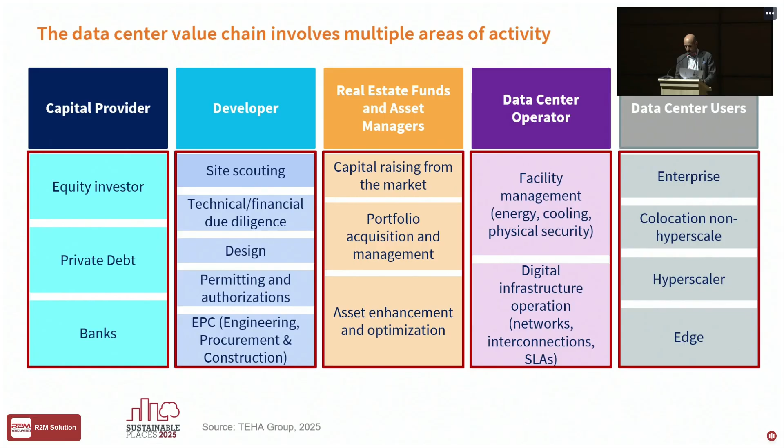The first one relies on the complete absence of dedicated finance for data centers in Europe, and the complete absence of a proactive role of real estate within the European data center environment. This is quite different from what is going on in the US, or also in the UK, where data centers are among the first investment choices for real estate. What we see now in Europe is that the data center is not among the priorities for investment. We are just above self-storage investment, so very low interest from investors.

Why? Mainly because we have an environment that is not proactively evolving in order to allow investment and provide certainty to the investor. We have a regulation that is too fragmented. We have a very low understanding of the demand. As we see in the US, it is driven by the development of large language models. In Europe, we don't have this kind of rising demand. There is a lack of liquidity and transparency regarding this. Most of the data centers have been developed by hyperscalers. We have no more liquid demand for different kinds of infrastructure. We have the problem of energy, and we have the problem also of local context.

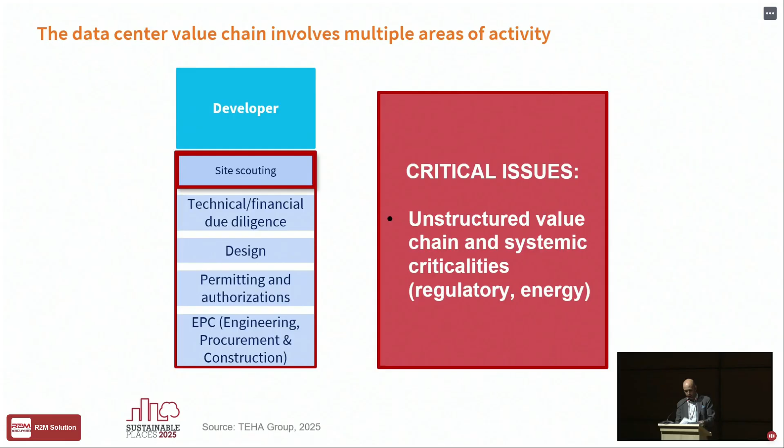The third criticality is the developing - I call this the Far West. Since I started the community with Microsoft, AWS, and other partners, I receive at least 10 proposals for sites a week on LinkedIn, but none of these sites is suitable for a data center, because they come from developers used to working in renewable energy, and the process to qualify sites for data centers is completely different. We need to develop a site qualification process that is more suitable to provide de-risking to the developers. I'll just jump to some evidence to arrive at the conclusion.

The last criticality is talent. Hopefully there are several universities now working to promote technical people able to work on data centers, but we also need to look at the people able to work, let's say blue collar, on the plants related to the data center. I conclude by inviting you to have a look at our website and the activities we are currently running on the Ambrosetti data center community. Thank you.